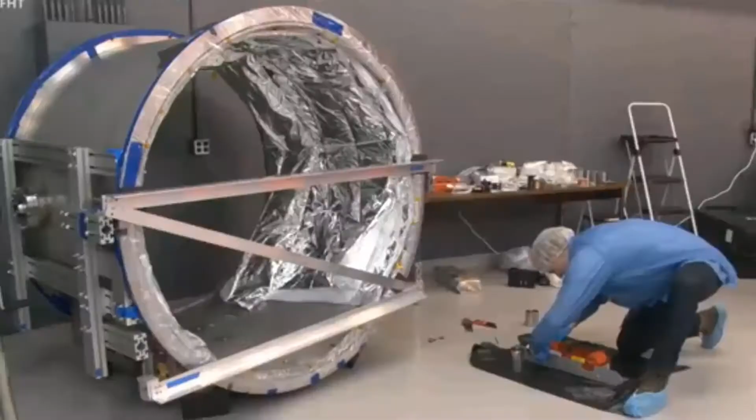As a scientist, I have to build the puzzle pieces that I need to build this history of the universe. A Canada-France telescope is multifunctional. We need to think about solutions to improve the instrument, to make things work. One of the most impressive discoveries that we made here is an object that came through the solar system, and we were able to catch it. So we're trying to predict the evolution of the universe for the future.

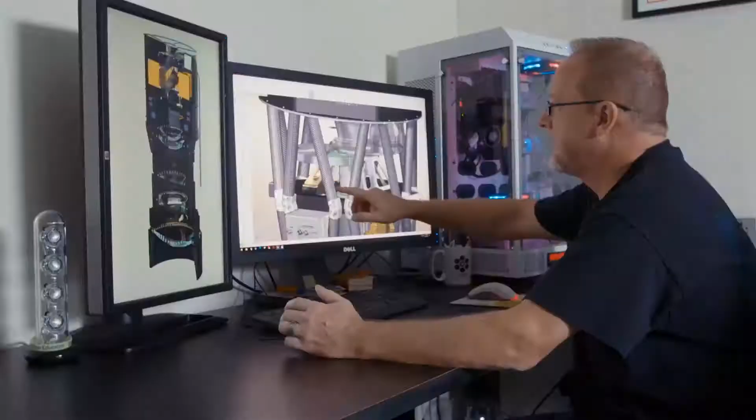Hey there, SOLIDWORKS users. This is Concepts in Production, bringing you a sneak peek at what's new in SOLIDWORKS 2019. We've got some great features to share with you guys, and it's only a glimpse of what you can expect in next year's release.

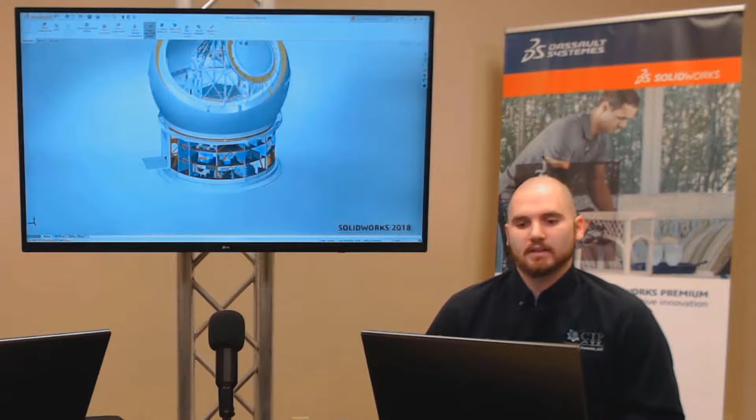One of the most requested enhancements for SOLIDWORKS 2019 has been graphics performance. And assemblies, especially large ones, can tax even the most powerful of systems. Over the years, SOLIDWORKS has done many things to optimize the way a model performs on the screen. For instance, large assembly mode will turn off model edges, shadows, and reflections. RealView is disabled, turning off the realistic appearance and textures. And the level of detail is set to fast. All of these optimizations make the view manipulation much faster, but at the expense of visual appeal.

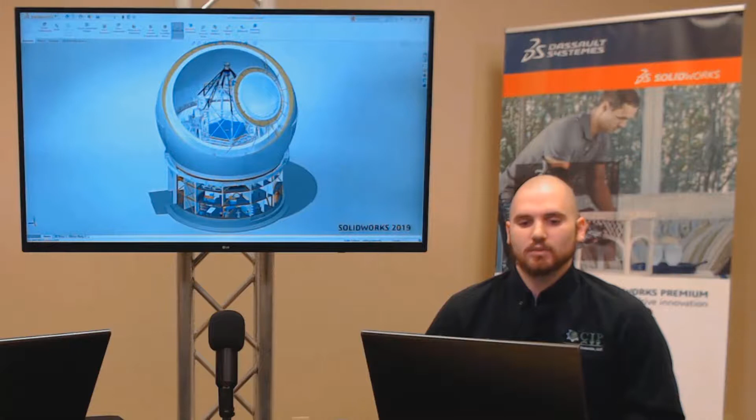Now, SOLIDWORKS 2019 changes the game. View manipulations are lightning fast, even with large assembly mode turned off. In a side-by-side comparison, you can clearly see the improvements. Dynamic view operations, such as zoom, pan, and rotate, are dramatically faster. Users see fewer dropped frames or that clunkiness when rotating large models or assemblies.

More of the graphics calculations are now done on the graphics card itself, providing much better performance. In fact, SOLIDWORKS now scales with graphics card hardware, allowing users to further accelerate dynamic performance with high-end graphics cards. These graphics enhancements enable you to manipulate your assemblies without sacrificing visual quality.

Continuing along with performance, we have the new edit mode within Large Design Review. Large Design Review is a capability that has been available in SOLIDWORKS for many years and allows users to open very large assemblies lightning fast, giving you the ability to quickly interrogate the assembly or model or conduct a design review. Let's get into SOLIDWORKS and check out these new enhancements.

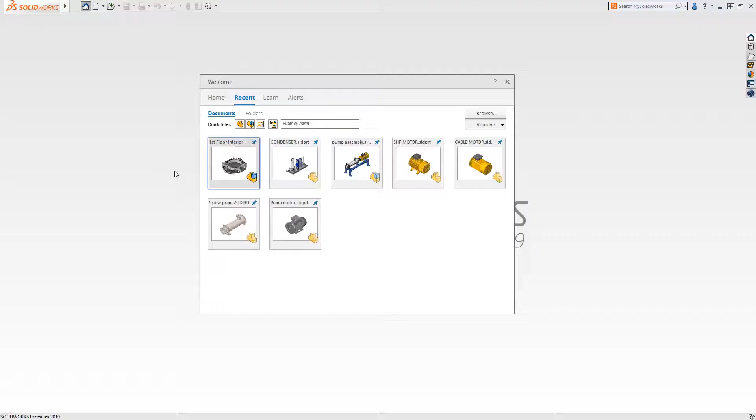In Large Design Review, users have access to the FeatureManager, and it provides super fast view manipulation to rapidly visualize and move around the assembly. The ability to measure distances, as well as the capability to do section views or cross sections, and walkthroughs are all possible. We can even hide and show components. All of these are valuable tools to interrogate a large assembly.

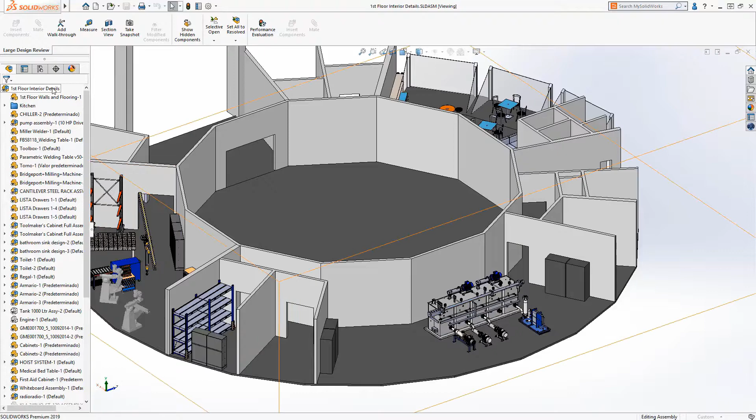Now in SOLIDWORKS 2019, Large Design Review has been enhanced to include assembly editing capabilities. Reference geometry like planes and axes are accessible, as well as mates, where changes can be made to how a component is assembled. Sketches can be shown or hidden and can be referenced for adding mates or for visual clarity.

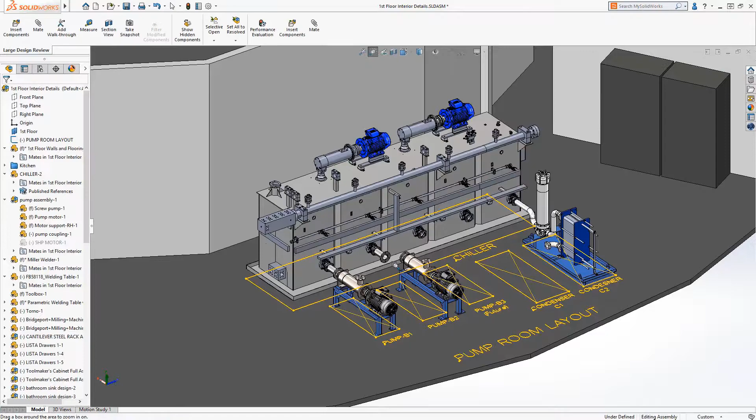If you are looking to delete a few components that may not be needed, this can now be done in edit mode. New components can be added to your design just as you would in a fully resolved assembly, and these new items can be placed and mated into their proper positioning. Mating is done just like you would in lightweight or resolved mode, including the use of the quick mate toolbar.

Components that have been prepared with magnetic mates can be added to the assembly as well and snap into position as you would expect, saving a great deal of time when doing large facility layouts.

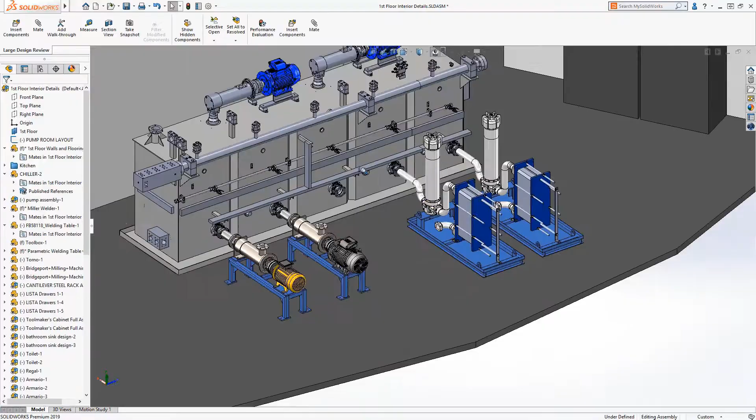When done, we can analyze our model and even add in or unhide the components that were hidden earlier. And when we're finished making all of these changes, the assembly can easily be saved so that the next time it is opened in resolved or lightweight mode, you can be assured that all of your work has been retained.

With these enhanced capabilities in SOLIDWORKS 2019, users will be able to take advantage of the excellent performance of Large Design Review and be able to rapidly make changes to their assemblies. These are just a few of the new capabilities on the top level of assemblies.

Jared will now show us a glimpse into the specific day-to-day usage of assembly enhancements in SOLIDWORKS 2019.

Thanks, Ben. Assembly delighters is always an exciting portion of what's new in SOLIDWORKS, and the 2019 release is no exception. This year there's a focus on detailing in your assemblies so that your workflow is smoother with even more capabilities at your fingertips. When working with assemblies, it can be easy to accumulate a lot of mates, which can make it time-consuming to search through those mates for one in particular that needs attention.

Now in 2019, you have the new Group Mates option, which makes it far easier to navigate the Mates folder. You can group mates by status or separate fasteners. When grouped by status, mates are separated into folders. This way, a mate with errors isn't mixed with all of your correct mates. Differentiating between the solved mates folder and the errors folder makes it faster to identify and repair mates. The new group mates option is definitely going to make organizing and editing your assemblies even faster.

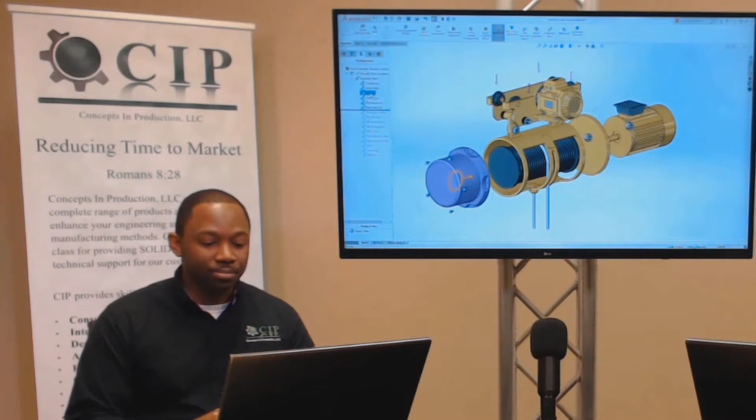This is where exploded views have been extremely helpful in the past. And now there's even more functionality with this great tool. A new rollback bar is available when working with exploded views. This rollback bar works really well with the new capability to name explode steps to help users really visualize an

explode sequence. You also see that there are more output options when you go to post out your videos. With this increased flexibility, you can really fine-tune your explode animations. It brings you a step closer to capabilities you have in animating with motion or in SOLIDWORKS Composer.

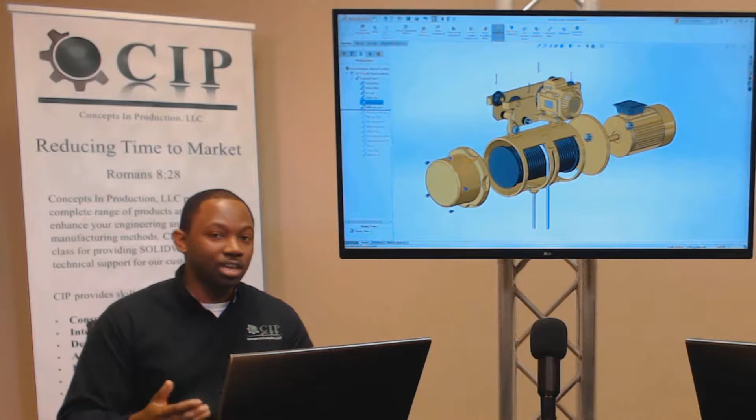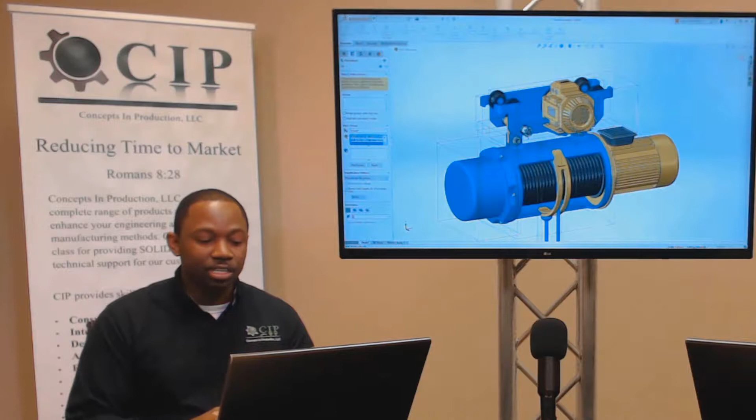Finally, the Defeature tool has been enhanced. Creating highly detailed production-ready components is something that SOLIDWORKS really excels at, but all of that detail isn't necessarily required, especially in higher-level assemblies. The Defeature tool provides the capability to massively remove unnecessary detail to improve large assembly performance, or even to protect your intellectual property.

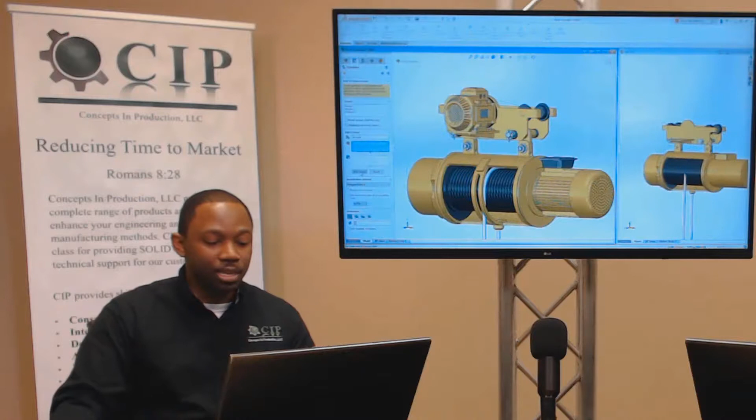SOLIDWORKS 2019 introduces a new silhouette option to help simplify an assembly based on the outlines of components and bodies. There's also the new option to select identical components, which allows you to grab all instances of a component in one go. If you're providing parts to a customer, or even including these parts internally for your organization, it's going to be quicker to simplify your parts. And with these additional options, you have more flexibility and control over how much detail you show in your model.

We're also going to see some great new capabilities that not only improve the user experience, but increase your daily productivity as well.

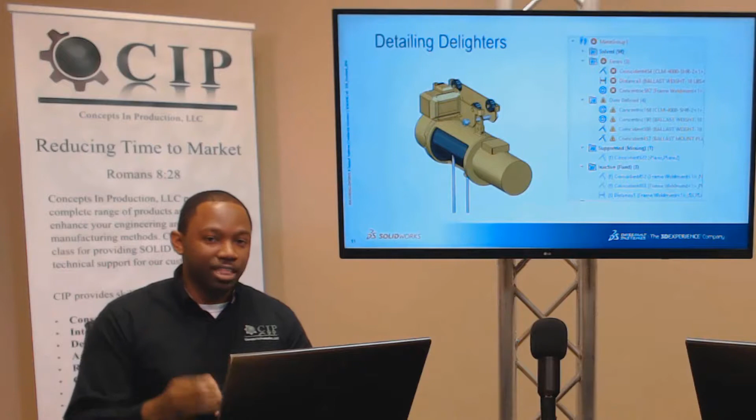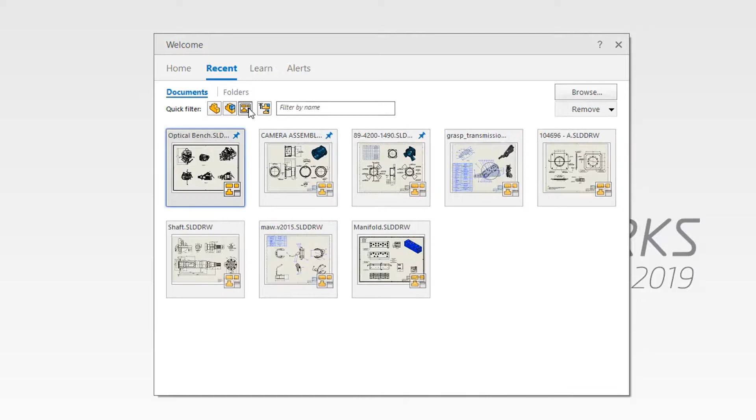You'll remember from last year, the welcome screen was introduced to help you get started modeling more quickly. This welcome page has been updated and now lists up to 100 of your recently opened documents. You can even change that number in your system options. Each document is displayed with its own preview, and the new quick filter can be used to refine the list by displaying only parts, assemblies, or drawings.

Want to search a recently used model by name? Type the name of your model in the new Filter by Name dialog, and you can quickly find and open your assembly in a matter of seconds.

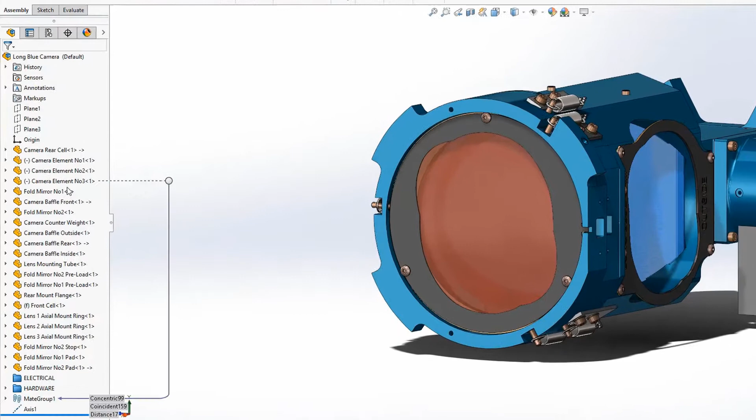Building relationships between features and parts is a powerful method of capturing design intent. SOLIDWORKS 2019 makes it even easier to view and manage external references. References can now be broken or locked when dynamically viewing parent-child relations from the Feature Manager.

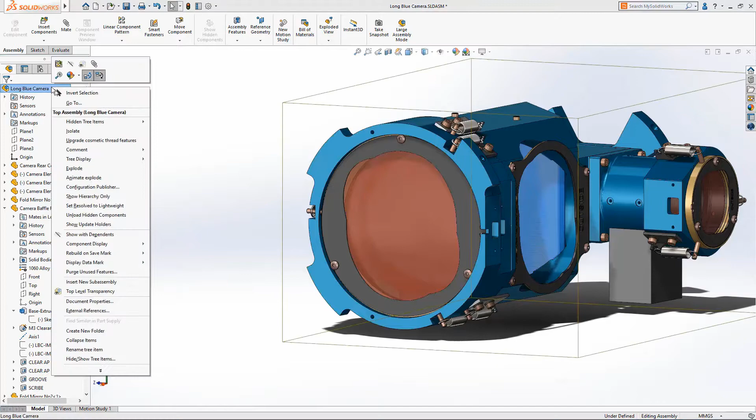When using a top-down approach to design, assemblies can consist of many parts, each containing numerous external references. The references for an entire assembly can now be viewed and managed in a new interactive dialog box.

With the new Mate options, the Enhanced Defeature tool, and so much more, we can expect it to take less time to give more attention to detail in parts and assemblies.

Martin has joined us now, and he's going to give us some insight into manufacturing in SOLIDWORKS 2019.

So you talked about some of the user interface improvements, like with the new welcome screen. I want to look at a couple of the tools that were introduced, like the welcome screen in 2018, and have now been improved and enhanced in 2019, specifically Topology Study and SOLIDWORKS CAM.

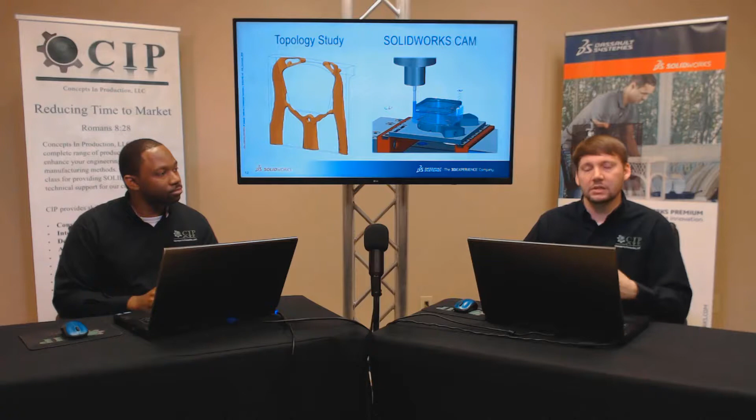So Topology Study, if you haven't had a chance to work with it yet in 2018, if you're still working in 16 or 17 and haven't upgraded yet, I want you to know a little bit about it. It's a design guidance study type that you actually set up just like your regular FEA SOLIDWORKS simulations with regular fixtures, loads, and meshing properties. But it adds in goals and constraints, so you can control and optimize best stiffness to weight ratio, control manufacturing controls like wall thickness or symmetry, and SOLIDWORKS Topology will go in and optimize the geometry of the part based on those requirements.

That's going to give you a lighter weight part with less material requirements, and you can even make sure the output is suitable for traditional manufacturing processes like casting or machining.

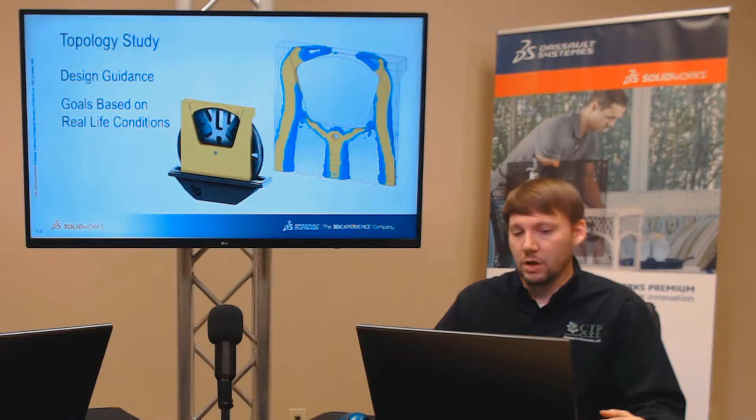Now, many designs have constraints that go beyond just stiffness or weight requirements. And with 2019, we've got some improvements, namely the ability to do a frequency response constraint. So now you can limit the frequencies to a certain area, a certain value, or below or above a certain value. Also, they've added in stress and factor of safety constraints that you can use as well, just for more intuitive controls over how the topology study works.

Also, topology studies in 2019 can be directly exported to a solid mesh body. That's going to allow users to interact with faces and vertices, take measurements, and do mass properties with the results, as well as options for section views, applying appearances, using interference detection, and other Boolean operations. So with topology study in 2019, finding that ideal shape to meet your design requirements is easier and faster than ever, really speeding along that process from design to manufacturing.

Now with SOLIDWORKS CAM, another tool that was introduced in 2018, we have fully integrated CNC programming right inside of SOLIDWORKS for 2.5 axis milling and turning.

SOLIDWORKS CAM leverages automatic feature recognition to evaluate the geometry, actually independent of the SOLIDWORKS features themselves. That means we can bring in files and models from other third-party CAD programs or even step files, parasolid files, and SOLIDWORKS CAM is able to recognize the geometry and interpret it into things like pockets, perimeters, and facing operations.

First of all, typically as a straight tool gets to the bottom of a part, there's a risk that the shank, the non-cutting portion, will touch some of the top faces that were machined earlier in the operation, spoiling the surface finish. SOLIDWORKS CAM 2019 now gives us the opportunity to use taper and neck options for the non-cutting portion of tools. This is going to allow us to simulate more realistically the type of tools we'll be using. And as you make these adjustments on the tools, a preview actually updates so you can more easily achieve the final result.

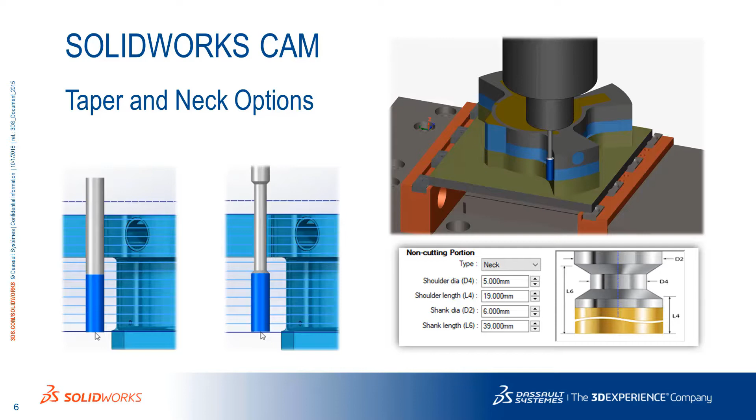Also, when you have to meet strict tolerance requirements, sometimes it's necessary to have offsets on the position of the toolpath compared to the model geometry. And even a small incremental adjustment like this can result in time-consuming workarounds, sometimes having to edit the code itself, or other times even change the model geometry. Well, with 2019 now, there's a new move command that will allow you to move SOLIDWORKS CAM features in the X, Y, and Z direction, offsetting them so you can easily machine to tolerances without the extra rework that's often necessary.

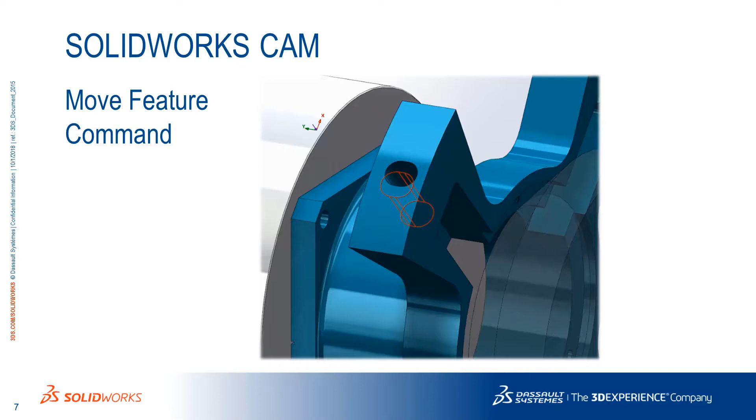With tolerance-based machining in SOLIDWORKS CAM, you can leverage DimExpert dimensions or model-based definition information—dimensions and tolerances built right onto the 3D model—to apply your preferred machining strategies based on the tolerance scheme. Default machining strategies for undersized, nominal, or oversized tolerances can be defined for any given tolerance size range.

With these new enhancements to manufacturing tools in SOLIDWORKS 2019, you'll have even better capabilities with SOLIDWORKS CAM and topology. Joe's joined us now, and he's going to take a look at what's new with deliverables in 2019.

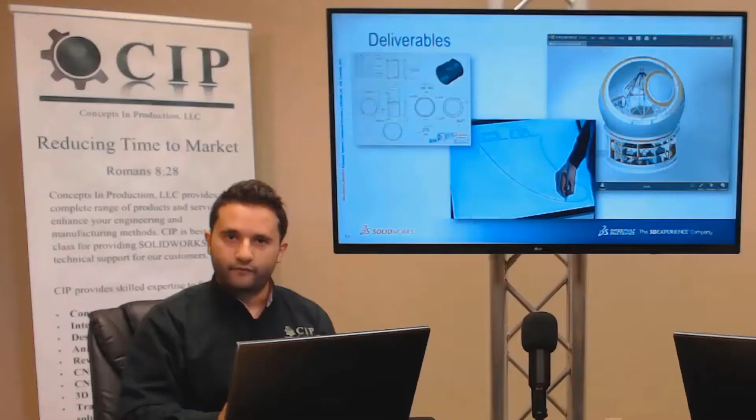Thanks, Martin. When it comes to deliverables, SOLIDWORKS 2019 brings some great new enhancements that'll make you even more productive. Those enhancements are included in drawings, e-drawings, touch sketching, and 3D markups. In drawings, SOLIDWORKS 2019 brings new enhancements that make documenting your designs even faster.

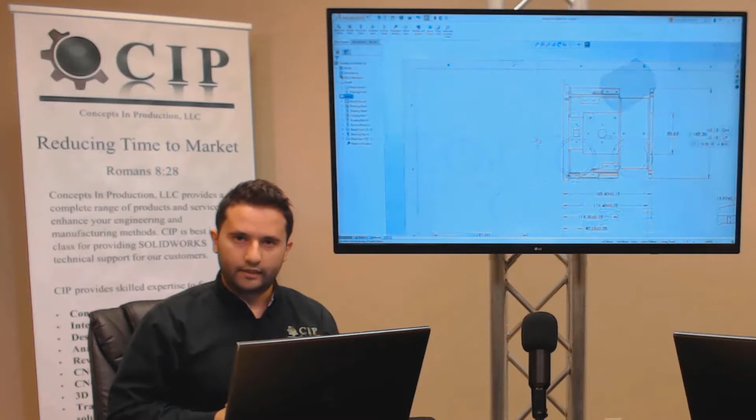You can now create a slice section through the model at any location using the new removed section view command. Simply select two opposed model edges and a view is created perpendicular to the section line, eliminating the need to create any construction geometry. Hole tables are a great way of displaying hole location and size information without cluttering your drawing view.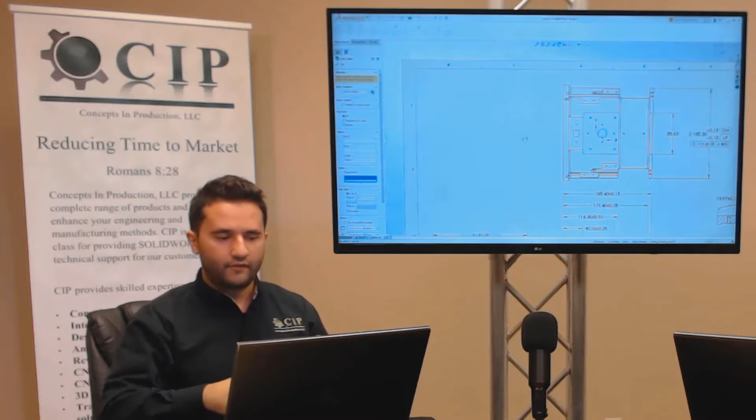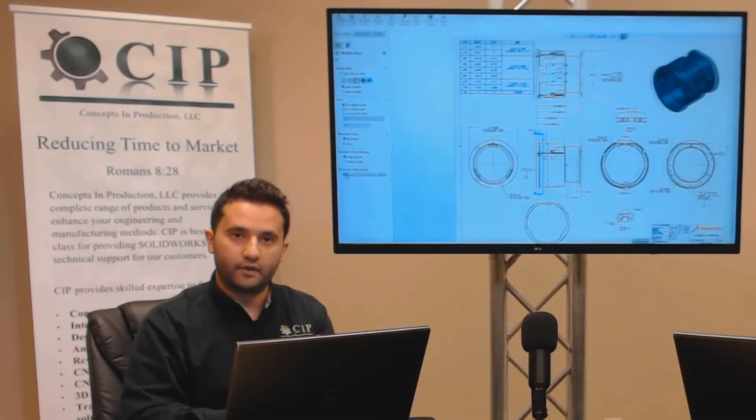Using dimensions that clutter your drawing can make it difficult to interpret, so SOLIDWORKS 2019 introduces new options that deliver greater flexibility over the way holes are tagged. Also new in 2019, you can control the update of individual drawing views by picking one or more, then selecting the new Exclude from Automatic Update option in the Property Manager.

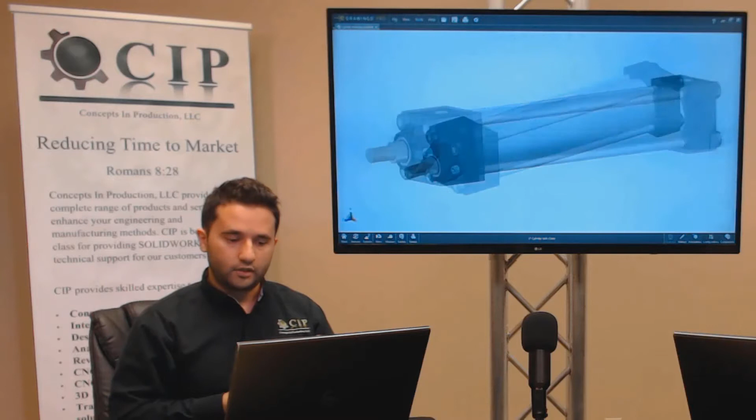Moving on to e-drawings, we all know it's a great tool for viewing CAD models, and with 2019 it gets even more valuable. E-drawings now supports several new CAD file formats: Parasolid, Solid Edge, ACIS, JT, and NX, all supported with e-drawings 2019, making e-drawings your go-to choice for CAD file viewing.

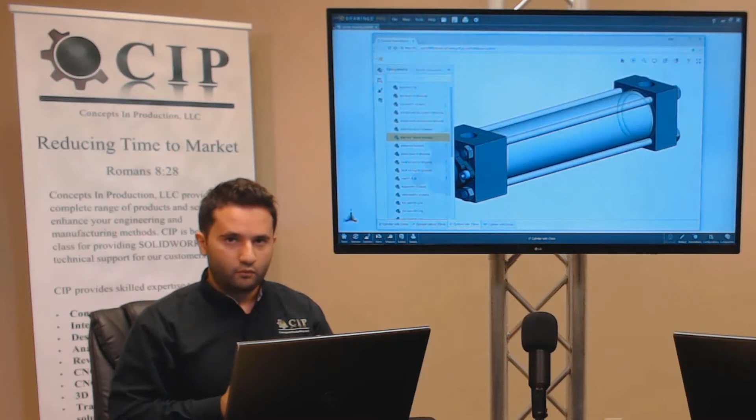Sharing CAD data from e-drawings is a great way to collaborate, and with the new HTML output, e-drawings models can be shared in a new format that opens in any browser without the need to install the software.

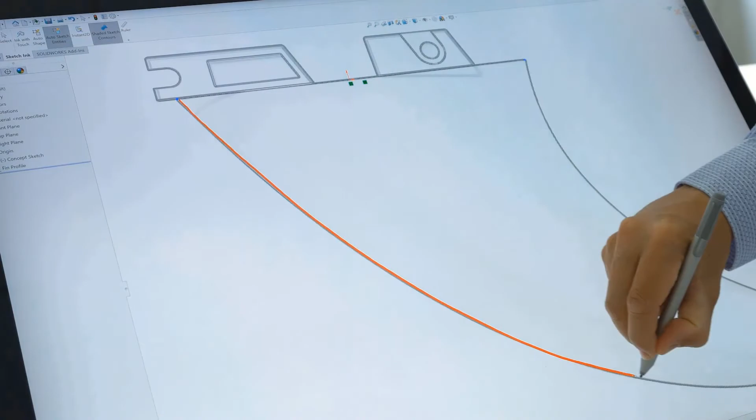As we remember, in SOLIDWORKS 2018 touch sketching was introduced. In SOLIDWORKS 2019, it delivers a wealth of innovative new productivity enhancements that let you take advantage of the latest cutting-edge hardware technology.

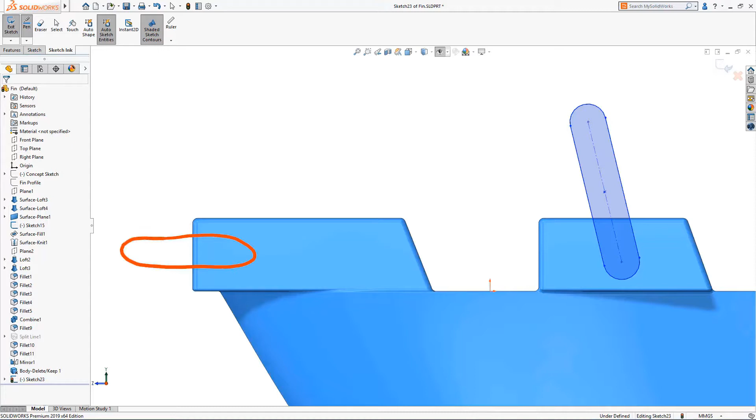Whether you design complex shapes or simple mechanical parts, SOLIDWORKS gesture sketching provides an innovative approach to capturing rapid-fire design ideas. Not just a tool for the industrial designer, gesture sketching provides a quick and easy way to create prismatic designs. In addition to lines, arcs, and circles, hand-drawn slot shapes are now recognized and converted into slot sketch entities, enabling this new approach to model creation regardless of geometry.

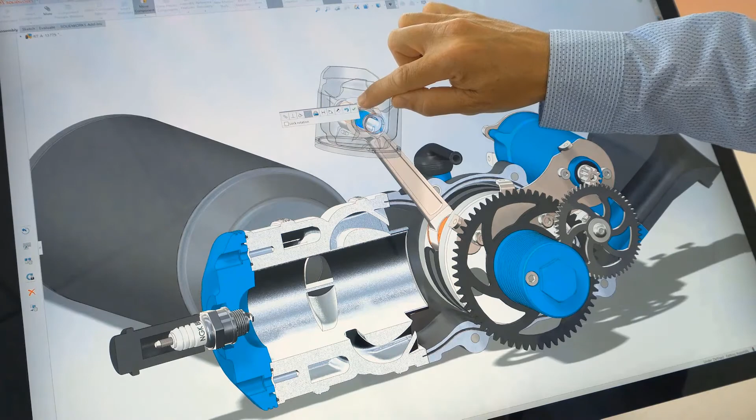Finally, using touch interaction, you can quickly and easily assemble parts together using Smart Mates. Simply tap the desired face of each part on screen, and the components automatically snap into position. As you work, SOLIDWORKS interprets your touch inputs and gestures, intuitively switching model behavior based on your selection.

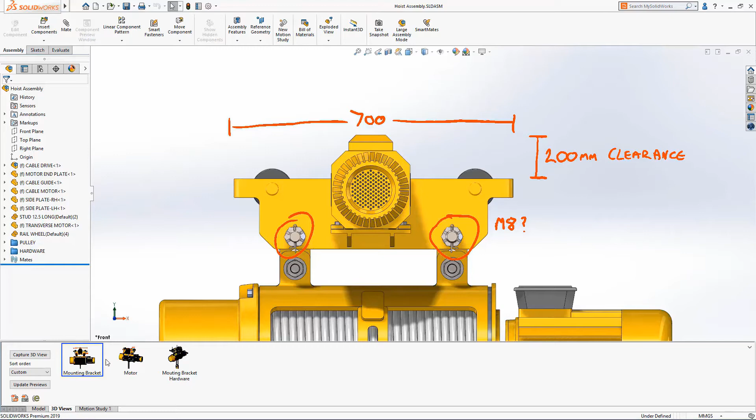Good communication among design stakeholders is an essential part of any successful design process. SOLIDWORKS 2019 introduces a brand new way to communicate your design ideas by enabling you to add markups directly to parts and assemblies when using a touch device.

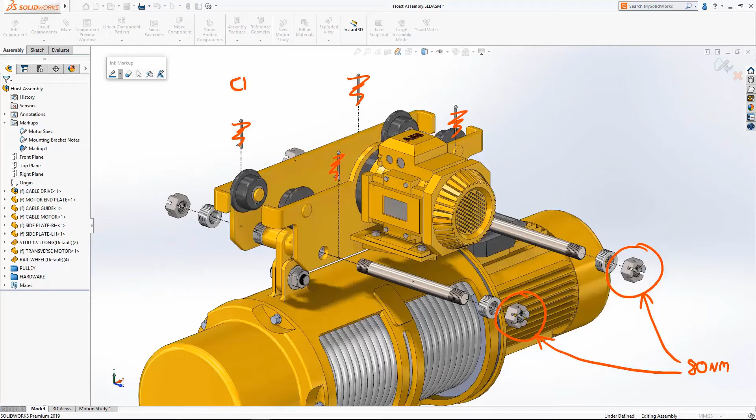As you write, your notes are captured together with the orientation of the markup view. Markups are stored with the model and can be viewed by other members of your design community using SOLIDWORKS on any workstation, whether touch-enabled or not.

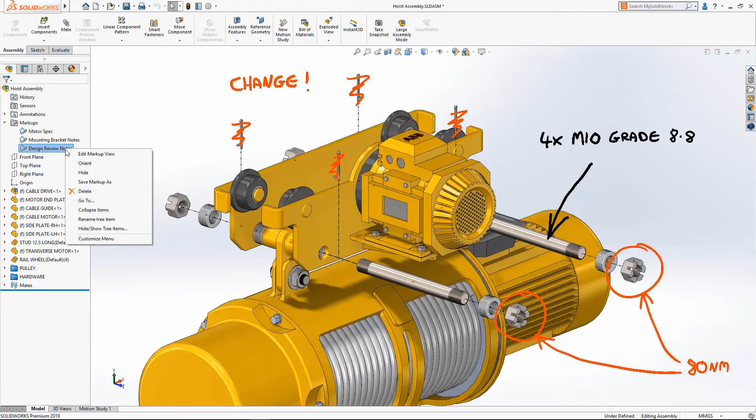When finished, the markup view is automatically captured and stored in the markups folder, and given a name to signify its purpose if required. Markups stored with the model can be exported in a variety of industry-standard image formats or PDFs, ready to be shared with other stakeholders outside your SOLIDWORKS design community.

Whether you're in the office or on the go, SOLIDWORKS 2019 brings some great new enhancements that'll boost your innovation and productivity. That's great, Joe.

So that's it for our first look at SOLIDWORKS 2019. But if you didn't see a feature you were looking for or want to see more, don't worry—we're going to take a deeper look at these features and more at our annual Customer Appreciation event in November.